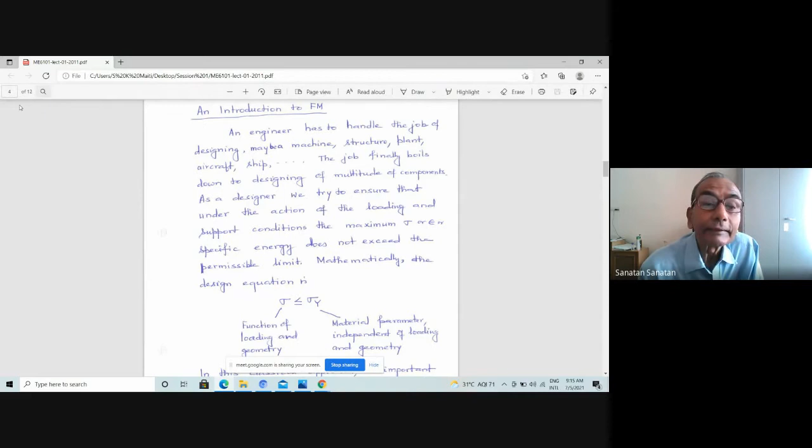Yesterday we did that, so where is that scale? It is on top. It's okay, a little more will also do. Okay, perfect, that's good. Thank you, thank you sir.

All of us are engineers, and mechanical engineers, one of the important jobs we have to do is the designing of machine structures, plants, aircraft, ships, and many things of that type. Even a system, a power plant, a whole aircraft - all these are our duties.

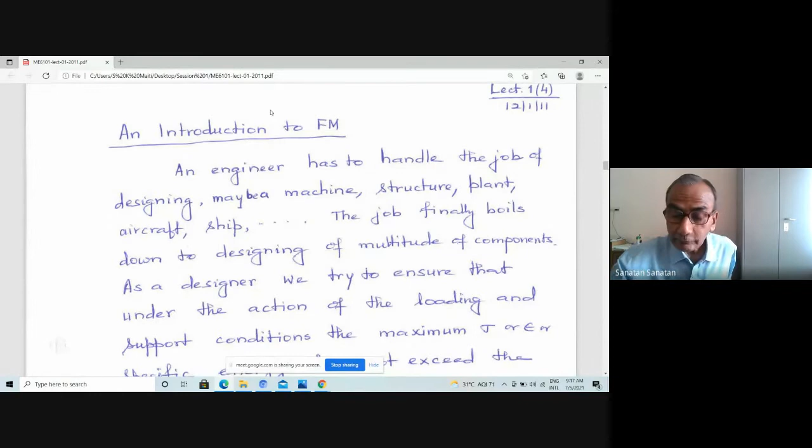If you really try to look at the core aspect of design, as a designer what we do is try to find out the action of loading on the structure, down to the elements of the structure. Our responsibility is to make sure that the maximum stress or strain in the whole component nowhere exceeds the permissible limit. Therefore, we generally consider the simple design equation that sigma is less than or equal to the permissible stress.

And if we try to make it a yield point based design, then we write that the maximum stress in the whole component should not exceed the permissible limit, sigma y, the yield point of the material. So that has been our traditional design strategy.

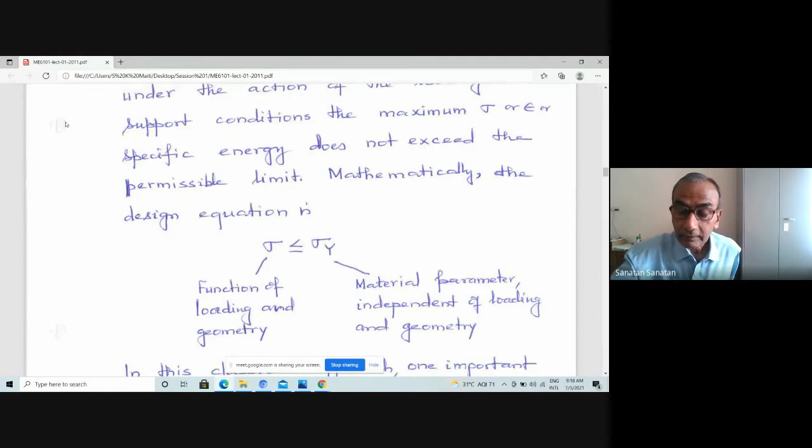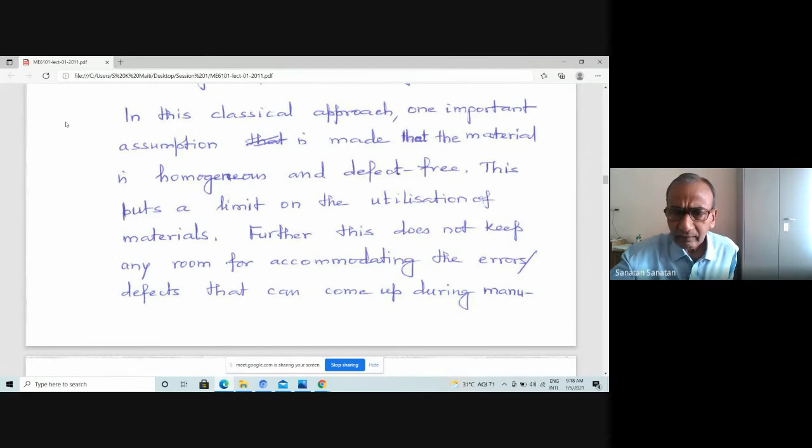Unfortunately, this strategy has some pitfalls. This approach has limitations - the material has to be homogeneous, free of defect, which puts a limit on the utilization of materials. Further, this does not keep any room for accommodation of errors or defects in the material, and these defects can come up during manufacturing or in service. So this approach does not really give us any room for accommodating all this.

Let me stress these points, they are very important. Defects in the material can come up in the parent material, during manufacture, or even during the service life of the component, so these are obvious, they will come. In fact, according to ASTM, 90 to 95% of components are not subjected to static loading, they are subjected to cyclically varying loading, and they are designed based on some approaches.

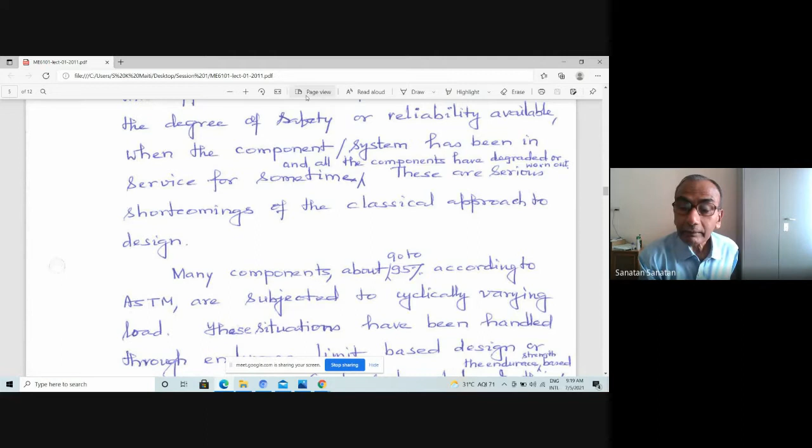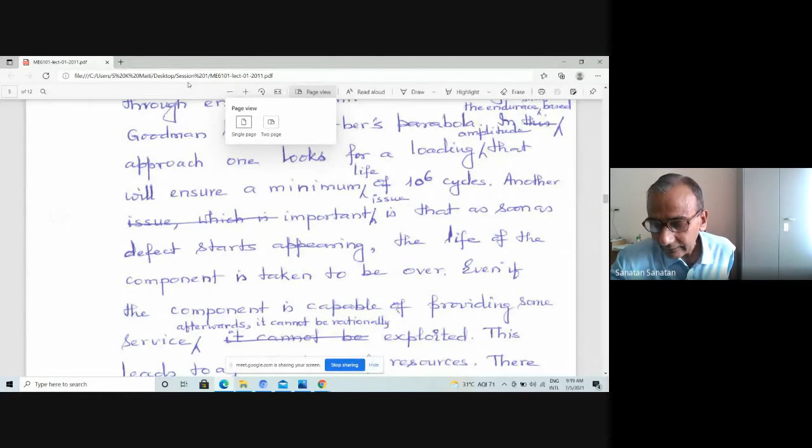Even considering design based on this approach, many components are subjected to cyclic loading, and our design is that if the component can withstand about 1 million cycles, that's fine - the load it can withstand will be the permissible load. But then the question is, even after expiry of that life, it does not become useless.

It still has some utility. If we wanted to see whether we can go on using that defective or damaged component for some more time, then the question is how long can I make use of it, and how do I go about finding out that question? There is no answer in the classical design approach that we take.

Now I just wanted to illustrate and give you some points for thinking. I'm sorry, what is this? Why has it become like this? You can just increase the size again by pressing that plus button. Now I think why is it actually... I also don't understand.

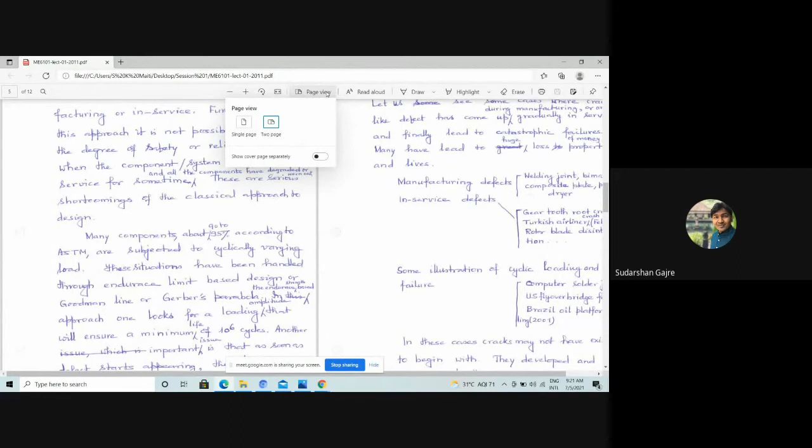Now you see why it has become like this - page view. Click on the page view, the fourth button on the top. Page view, single page, on the left, single. Yes, that's okay, that's what it is. This whole nonsense has come. Now let me see.

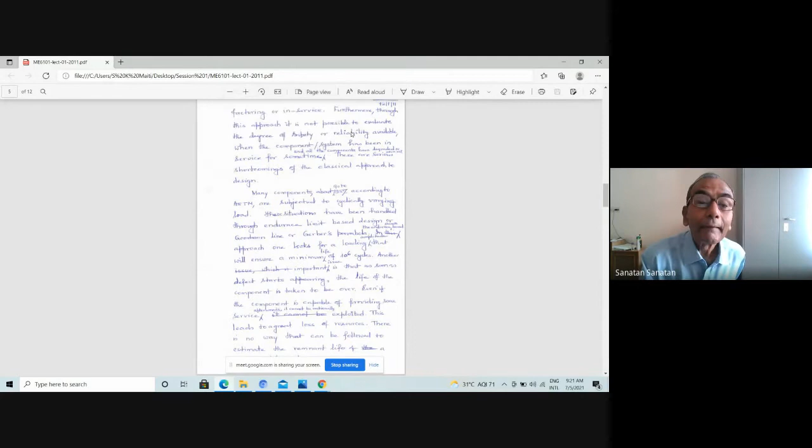Okay, sorry. No problem, sir.

Look at this manufacturing defect. Welding is a manufacturing operation, and during welding, defects certainly come up in the joint and welds. If we consider a bimaterial composite plate, there will be some disjoint, and then there is loss of continuity of material. So these are some of the defects which come up during manufacture.

Then coming to in-service defects, the gear tooth. The gear tooth is continuously subjected to loading which fluctuates from maximum to zero and back to maximum. This kind of loading comes up in service and leads to damage origination. So we have to ask: how do I ensure the safety of this component at that point? There are many failures that have come up because of these in-service defects.

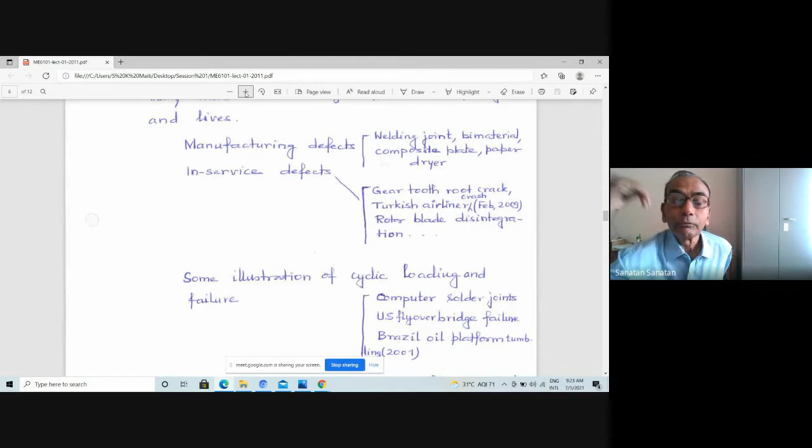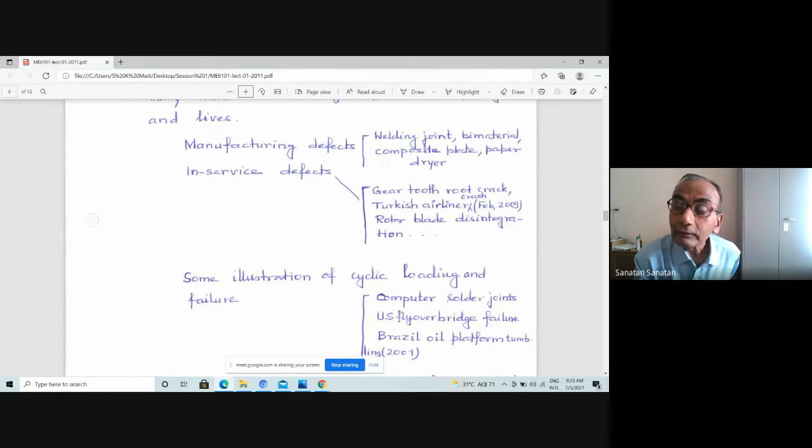Turkish airline, which failed in February 2009 - a rotor blade disintegration took place, originating from a crack and finally leading to catastrophe. There are many such examples which are recorded, and I would like to talk about them a bit.

Consider computer solder joints. Nowadays computer manufacturing has thousands of solder joints, and because of temperature going up and down, defects come up in these joints, leading to failure due to cyclic variation of load.

Another example: US flyover bridge failure, Brazil oil platform just crumbled down. These are all actually originating from some defect which came up during the service of the component.

So a crack may not have existed to begin with - it developed and grew gradually, and finally led to fracture. This is how catastrophic failure comes up. So therefore now the question is...

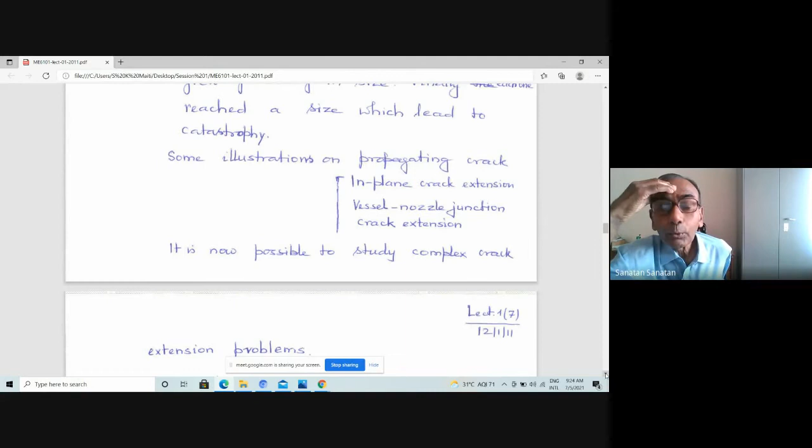Propagating cracks have also been noted in mechanical applications, particularly pressure vessel nozzle junctions. That is one crucial location, and if they are working under temperature-variant or load-fluctuating conditions, they also give rise to cracks which gradually propagate.

Now the question is, as a designer, we have to make sure that even if cracks are propagating, we should be able to take some preventive measure, or at least calculate the degree of safety and reliability of this component at that point of time, and if it's going to last for some more time, how long, and how do we actually determine that? These are some of the concerns.

Classical designs are not really in a position to give you an assessment of safety after the system has been used in practice for some time, and they cannot tell you how much load it can carry at that point. Therefore they cannot allow you to calculate the load capability or how much time we can go on making use of it. These are some questions it cannot answer.

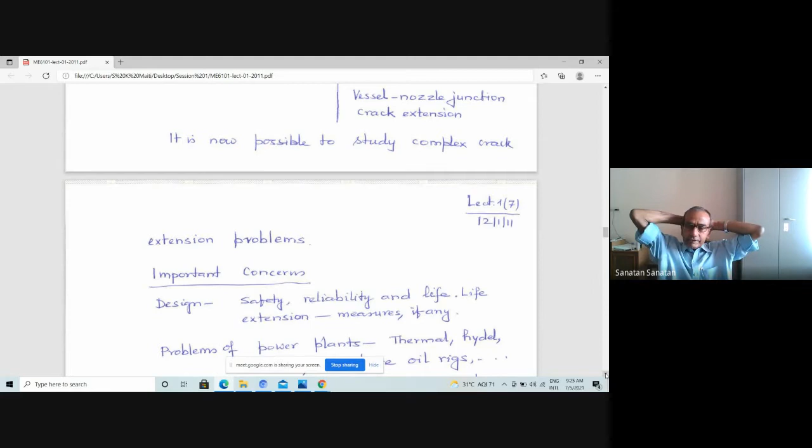Now the question is that designers and users of the system would like to know how much safety is available at this point of time and how long we can go on using it. These are some of the questions we cannot answer from classical design considerations, and therefore there are gaps.

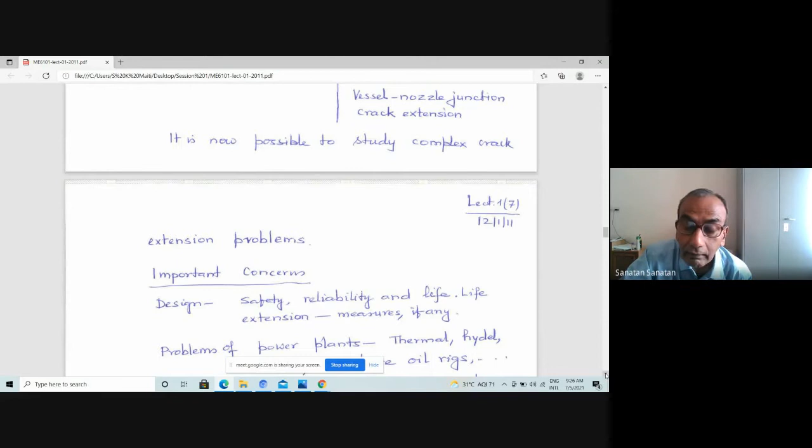The problems of power plants are also very important for consideration. Power plants - thermal, hydel, nuclear, offshore rigs - are subjected to fatigue loading, thermal loading, and deleterious environment. They work in environments that affect the structure and increase the damage because of their presence. These are issues which cannot be addressed by classical design.

Another important issue to recognize is that nowadays everybody is interested in using less material for the same machinery while being able to take more load. So everybody wants the design to become lighter, yet able to take more load and give more life.

So in the process, you see that the common tendency is to use stronger material, lighter material, and in fact, unfortunately, nature is not kind to us. If you make material stronger, it actually brings in some problems. Your less strong materials in general have a little bit of plastic deformation capability or ductility, which can really give some benefit. But as you make the material stronger, they are actually brittle, and therefore the problem increases.

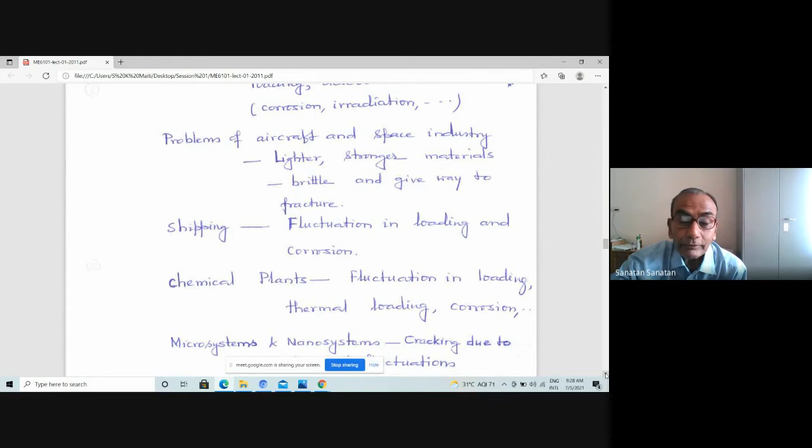Fluctuation of loading in the shipping industry: they are also subjected to corrosion plus fluctuation in loading. Chemical plants as such are subjected to fluctuation in loading, thermal loading and corrosion. So all these problems exist. Microsystems, nanosystems, cracking due to thermal fluctuation, that I was mentioning: in the case of solder joints in the computer, there are many solder joints, and these are subjected to thermal cycles, and therefore they also give rise to damage and then finally lead to failure.

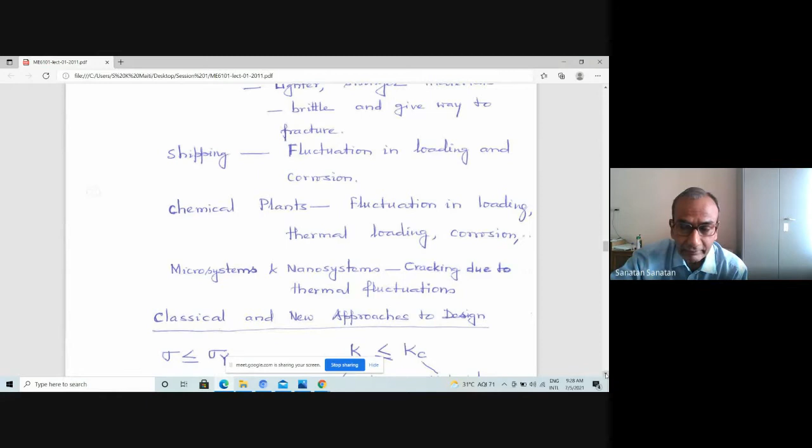So therefore the question is that many deficiencies are there in the classical design, where the maximum stress sigma is less than the permissible value sigma y. So this is the problem, that the old classical approach to design suffers from this. So there is a question of how you overcome this. And obviously a new concept has to come up, and fortunately it has come up with the development of fracture mechanics.

So fracture mechanics has finally given rise to a simple equation which looks similar to that classical design equation. It is K less than or equal to some critical value of K. If you put it in a slightly different manner, in design you take the structure and its loading and the different conditions under which it is operating, and under those circumstances you try to calculate the parameter sigma, which could be the maximum principal stress, the maximum shear stress, or if it is strain-based, maximum strain and all that. So the classical design equation looks like that. And fracture mechanics also has given rise to an equation of the type K is less than or equal to Kc.

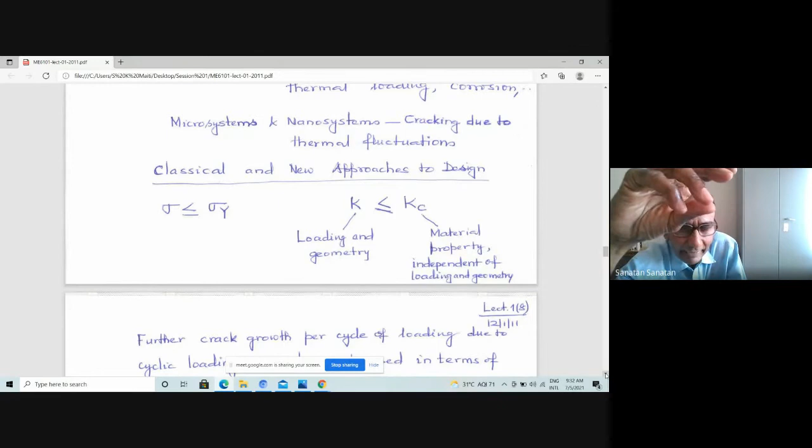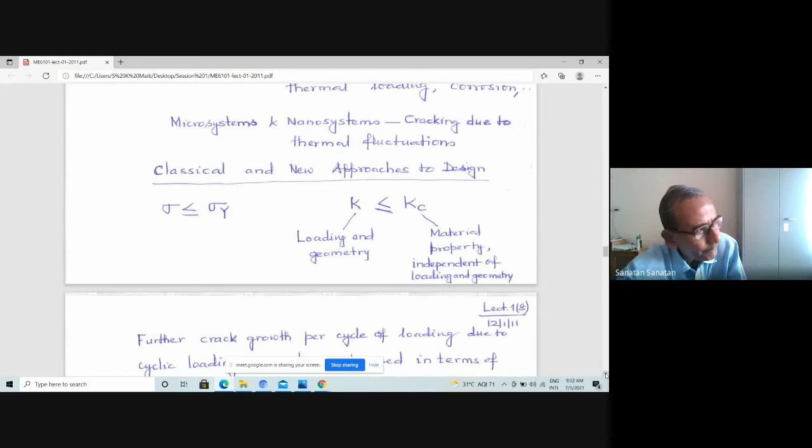So now you can extrapolate to the new design strategy, which is based on fracture mechanics. Fortunately, it has come up with a similar looking equation, K and Kc. K is the parameter determined by understanding the subject of fracture mechanics, and obviously you would also have concurrent experimental procedures to find out the permissible value of K. So this is how it is. Damage tolerance based design is really based on damage detection and calculation of the parameter associated with the damage in the structure, and then making sure that parameter is less than the permissible value which is determined experimentally. So this is how it is.

So you can imagine that in this new approach to design, you will be exposed to this background, and you should recognize that the lectures will make you aware of the parameter K, and at the same time, determination of that value experimentally. You will also be given some examples of applications.

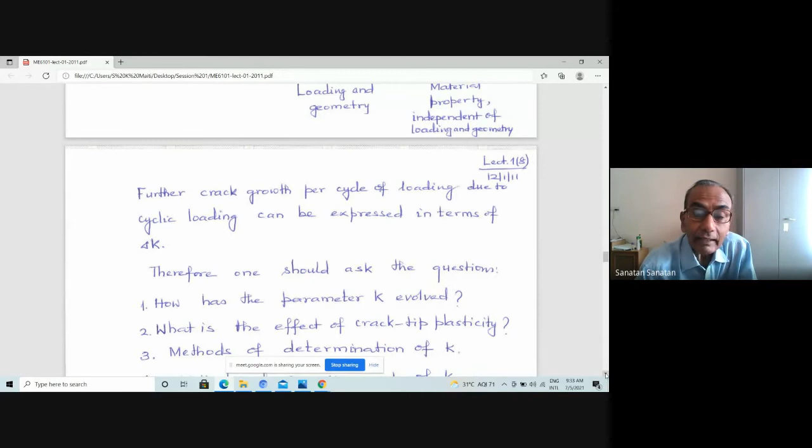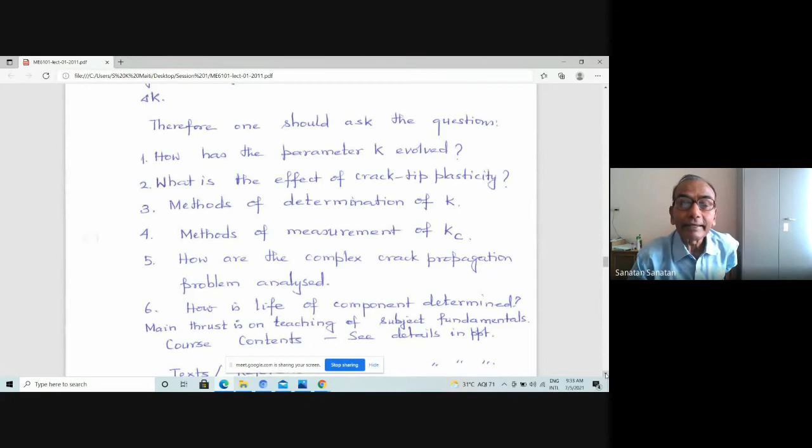So to sum up, as a participant, what you should be asking is: how has this parameter K evolved? That is the first thing. Even when you went for engineering, they made you understand what is stress, and then how to calculate the stress in components of various geometry. This is how it will gradually go.

Then, what is the effect of crack-tip plasticity? Obviously materials are not all perfectly brittle; there is some plastic deformation capability. So you will be given the understanding of how this crack-tip plasticity is accommodated.

Then this K parameter, sigma, like in classical design—how is this K parameter determined, and methods of measurement of the critical value of this K, and the propagation problem—we are also going to look into that.

If a crack originates in a component, it is going to propagate. If we know the path of crack propagation, we can take measures to prevent its propagation. So you will see how this crack propagation route can be determined. These are some of the things this course is going to bring out gradually.

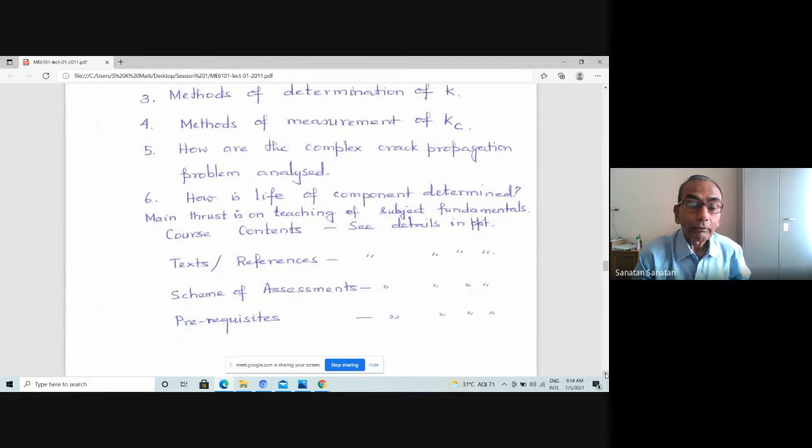That's all. Now let's try to get into some understanding you may already have, and new understanding that we are going to bring in. I will get started with that part.

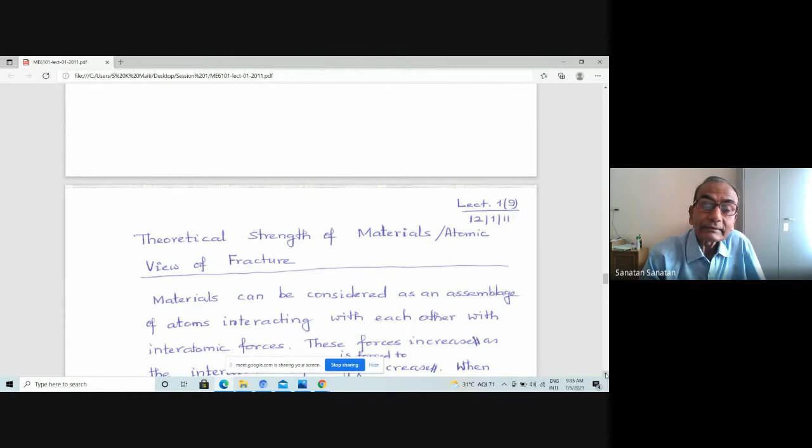If you consider how this subject originated, it also has a history. Material scientists were looking at material as nothing but an assemblage—an assemblage of atoms interspaced, interconnected by, or interacting with each other, through interatomic forces.

So when you consider a material as a picture of atoms placed in space and interconnected, you can imagine them connected by springs representing the interatomic forces. Atoms are interspaced and interacting with each other through these interatomic forces, represented by springs.

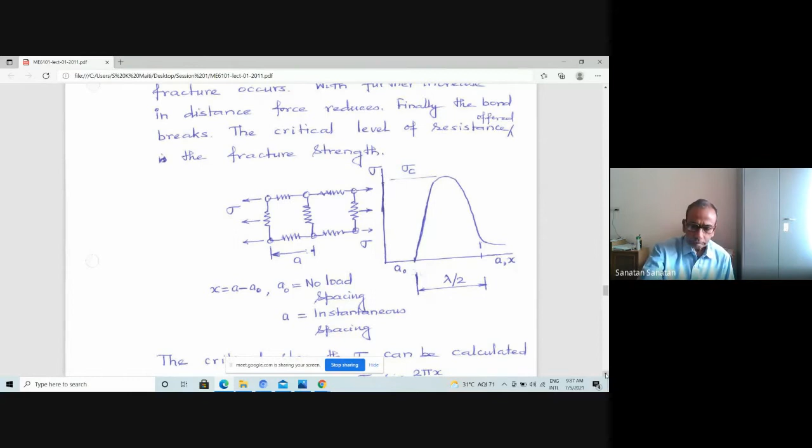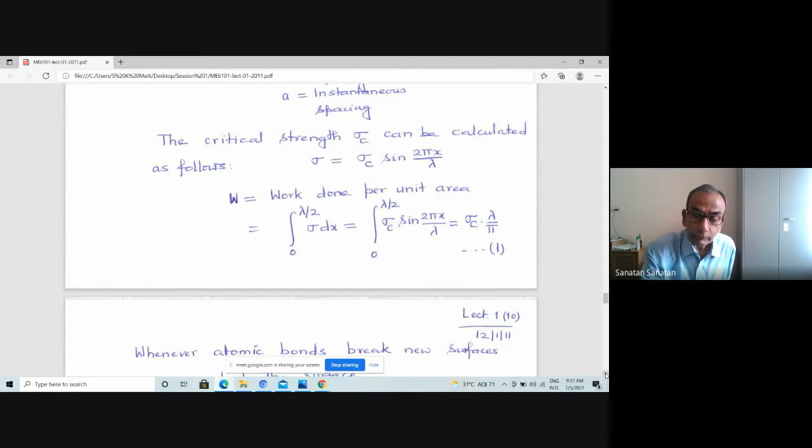This can be written as sigma varying in a sinusoidal form. So if you work out how much work is done in increasing the interatomic spacing, that is W, calculated as the integral of sigma dx over the half wavelength, lambda by 2. This gives the energy required, which is sigma c lambda by pi.

Now the question is, once you have put in this much energy, what does it do? When the material gets separated, where does that energy go? The energy cannot just be eaten up.

So what happens is, if you take a material of unit area and pull it, it breaks into two pieces. If you try to pull a chalk piece and keep pulling it, it gets broken into two pieces. The material is brittle here, so after failure, two surfaces are created.

New surfaces are created, and to create a new surface you need to supply surface energy. If each area is one unit, and gamma s is the specific surface energy, then to break the element you need 2 gamma s of energy. This energy comes from the work done when you are pulling it - you put energy into the system through that work, and when it fails, that work done supplies this surface energy.

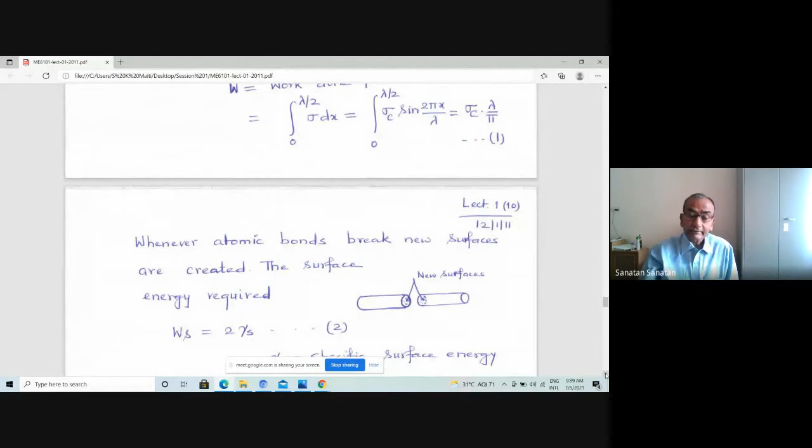It goes as surface energy. The energy can be considered as strain energy of deformation, and when the material breaks, that strain energy of deformation goes to supply the surface energy. So one form of energy gets converted into another, and that's how the new surface is created.

For energy conservation, the work done equals surface energy. By making some approximations about sigma as modulus of elasticity multiplied by strain, and doing a bit of manipulation, using W equal to WS, finally gives the strength - the maximum tension required - calculated as E into gamma S by A0. Here E is the modulus of elasticity, gamma S is the specific surface energy per unit area, and A0 is the initial spacing between two atoms.

This was first calculated by material scientists - what is the theoretical strength of a material? For any material you can calculate this theoretical strength. Using normal data for surface energy, the critical strength comes out as modulus of elasticity divided by 10. But for most engineering construction materials, the actual strength is in the range E by 100 to E by 1000. So theoretical strength is E by 10, but actual strength is E by 100 to E by 1000 - that's 10 to 100 times less.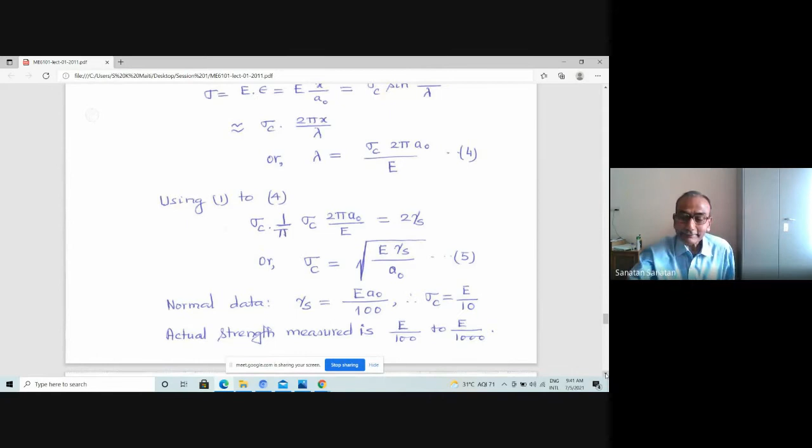This model, which was initially given, ran into these questions. Consider steel: ultimate limit is about 400 to 800 MPa, and E is 200 GPa, then the range of actual strength is E by 500 to E by 250. So this is much less than the theoretical strength.

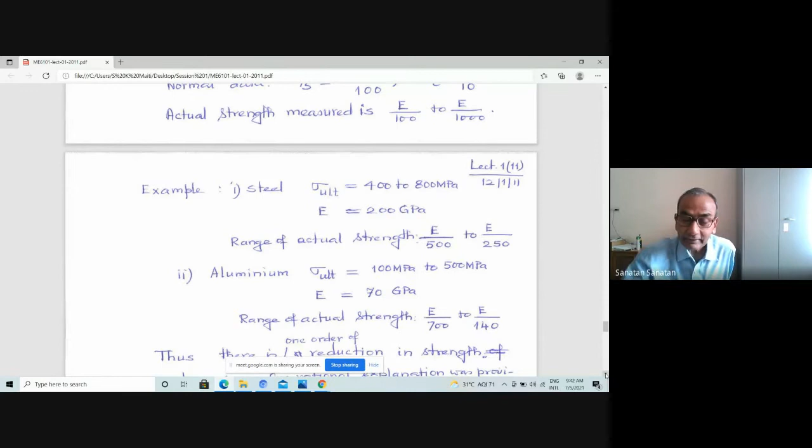For aluminium, ultimate stress is about 100 to 500 MPa and E is 70 GPa, giving an actual strength range of E by 700 to E by 140. Theoretical strength is E by 10, but actual values are E by 100 and more. So the question is: theoretical strength does not correspond to the actual measurements we see.

This remained a question, so scientists again searched for the answer, and the first answer was given by Griffith. He said that although we consider material to be defect-free and flawless, in actual practice there could be defects in the material in the form of cracks, disjoints, and elliptical cutouts.

That concept was brought in: although we apply sigma at the loading point, in actual cases the stress that exists at the tip of a stress concentrator, like a crack, is much higher. It's the stress concentration factor which amplifies the stress, and that actually fails the material - it breaks the material at a much lower level of external load.

That was one explanation given, but it was not very acceptable - it had pitfalls, because we generally consider design at the macroscopic level, not the microscopic level, and this model was really meant to be effective at the microscopic level.

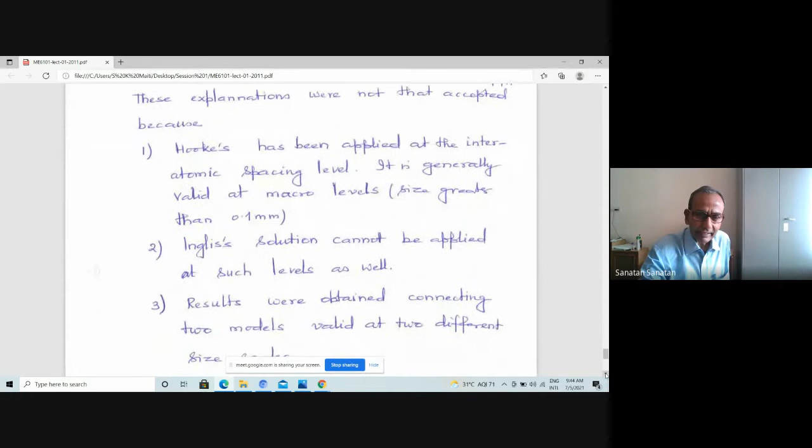So this mismatch didn't allow this theory to be acceptable for a long time. It didn't go further. Hooke's law is generally applied at the macro level, not microscopic level, but these models are actually at the interatomic spacing level, so they are also not acceptable. So all these things are gone, and finally new ways of thinking came up, about how can we really make something different. Just one second, I have to get some more slides.

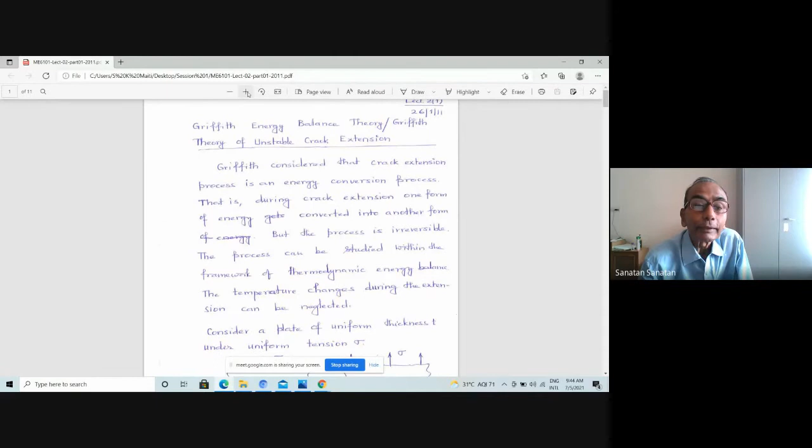Good, thank you. So this sort of explanation that was not acceptable by the scientist community, it had its end. And then a total different approach to consideration of failure came into being. I would like to stress that this is the state where this damage tolerant design concept, or fracture mechanics concept, started evolving. It's around 1920 that people started thinking. This thinking was actually at the beginning of the 20th century.

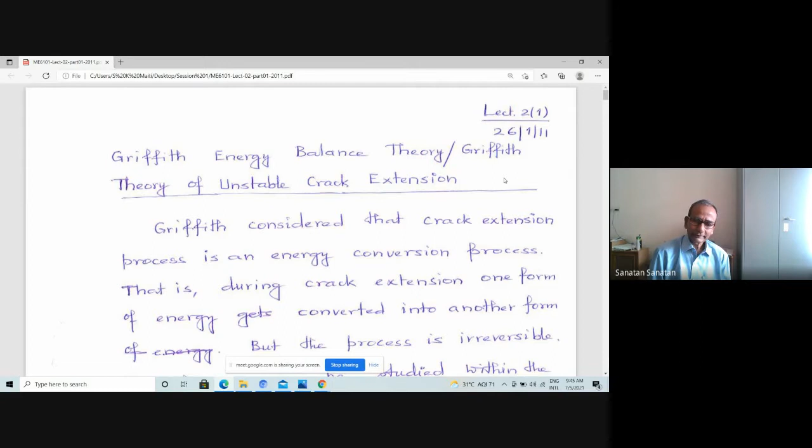And therefore this is something which came up in about 1921, so 20th century beginning. I would like to stress upon that please look at the way scientific development has come up. So Griffith was the first man who started actually thinking about the failure of the material.

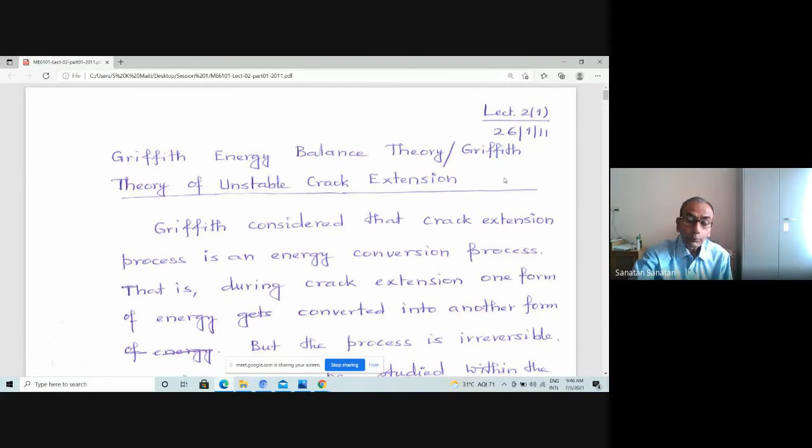It's not really that it is stress reaching a critical value or strain reaching a critical value, it is different. He started thinking that this material failure should be looked into within the scope of the first law of thermodynamics, energy balance. That if some failure is taking place, it's giving rise to transformation of one form of energy into another form, and therefore this energy balance concept should be the basis to understand failure. So Griffith gave the energy balance approach to failure, which made the beginning of fracture mechanics.

So what happens, if you try to take a flawless plate, then you have stress sigma everywhere, and if you just have a defect inside the material of size 2a, when you are pulling the material, it is logical to expect that the material above and below the crack becomes a shadow region. It does not actually get loaded. When you have a plate without any crack, it is uniformly stressed everywhere, but when you have a plate with a crack and it's loaded, there is some area which becomes a shadow area - there is no loading on it.

And therefore what he said is that this shadow area does not have any energy. Energy means when you load a component, it has strain energy per unit volume. But when you have this bit of material which becomes load free, it does not have any energy content. So you can think of it that as the load increases, the crack extends, and the size of this shadow region increases, so the quantum of material becoming energy free is also increasing.

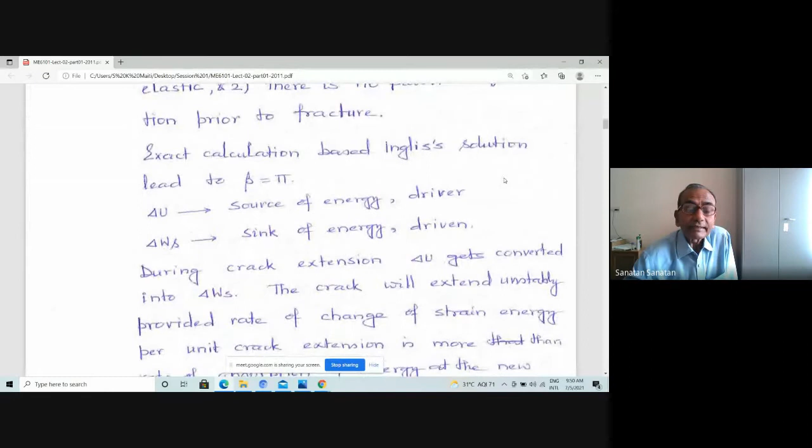He propounded that the rate of release of strain energy is the source of energy, and the rate of absorption of surface energy is the requirement. So the sink of energy is the surface, and the source of energy is the strain energy. The driver is the source of energy, and the sink is what is driven. So it is the conversion from strain energy to surface energy that is the crack propagation process.

So that's how the whole concept changed. No question of stress and strain anymore - it is more of an energy balance, a thermodynamic energy balance. So people started looking at crack propagation as nothing but a thermodynamic process of energy conversion.

With all the calculations, if delta U is the strain energy change per unit crack extension, and delta Ws by delta A is the energy required per unit crack extension, then this is the condition of unstable crack propagation: if your availability of energy is more than required, it leads to unstable crack propagation.

These calculations finally gave the critical stress capacity of a material, of the form sigma equals sigma CR, which is nothing but E times 2 gamma S divided by pi A, square root. This new expression had a similar structure to the classical interatomic spacing model, and this became the starting point of calculating the fracture strength of a material with a crack, with a defect.

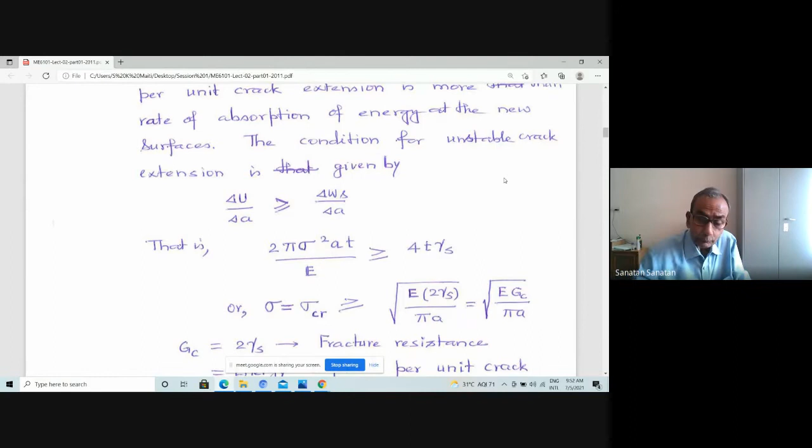First time it is with defect. So sigma CR is E times 2 gamma S by pi A, and it was written as E GC by pi A. GC is nothing but the fracture resistance of the material, and its value is nothing but 2 times gamma S, where gamma S is the surface energy requirement per unit area.

Griffith showed this experimentally - he did experiments, because nobody will believe without experiment. In science, you cannot just propound a theory and expect people to accept it; you must also show it experimentally.

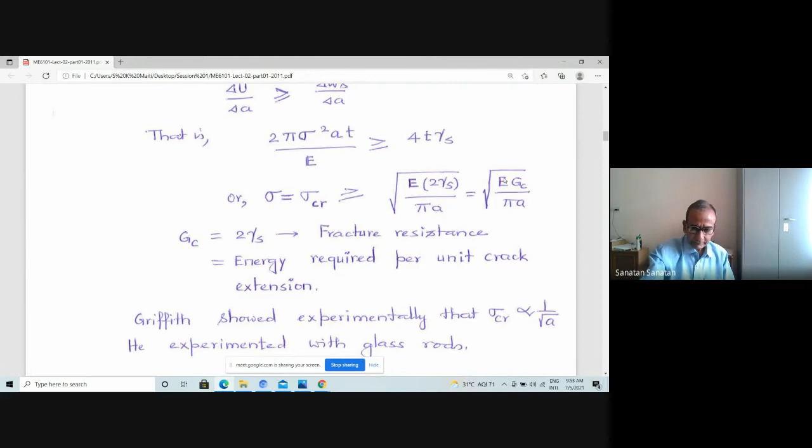Griffith did experiments and finally showed the relationship that sigma C is proportional to 1 over root A - a reciprocal relationship. He did experiments with glass rods, many experiments, and confirmed that whatever the theory predicted is exactly what came up.

So that's how it became the starting point for finding the critical load capacity of a structure in the presence of a crack. It is actually a fantastic stage of development in strength of materials or material science.

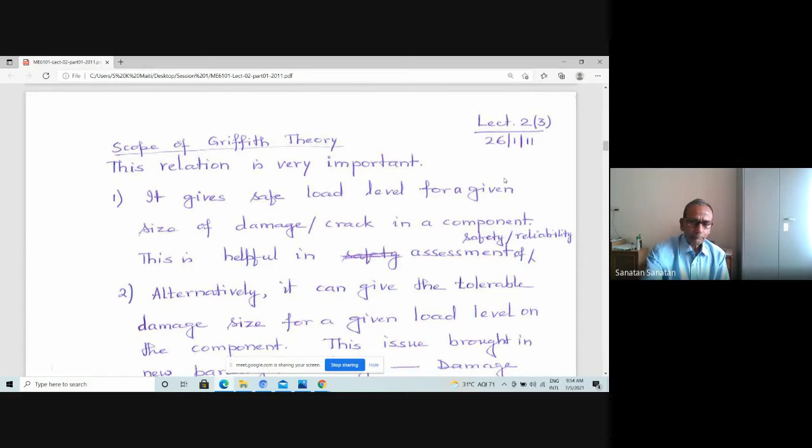Let us reflect on the scope of Griffith's theory. This relationship is important - it gives the safe load level for a given size of damage or crack in a component. So for the first time, you are in a position to calculate the safe load capacity of a component with damage or crack in it.

Alternatively, it can give the tolerable crack size for a given load level on the component. It gives you the critical load capacity once you know the geometry of the structure and the crack size in it. Alternatively, if you have a structure and loading, you can ask how much crack or damage can be tolerated - that's what damage tolerant design is about: how much defect can be tolerated in a given structure with its geometry and loading.

So that is the basis of this damage tolerant design. And in fact, it became a fantastic stage of development, and it really opened up the process of damage tolerance to aircraft design, all airborne structures, space-going structures, space-going vehicles. Structures are actually all the time designed based on damage-tolerant design.

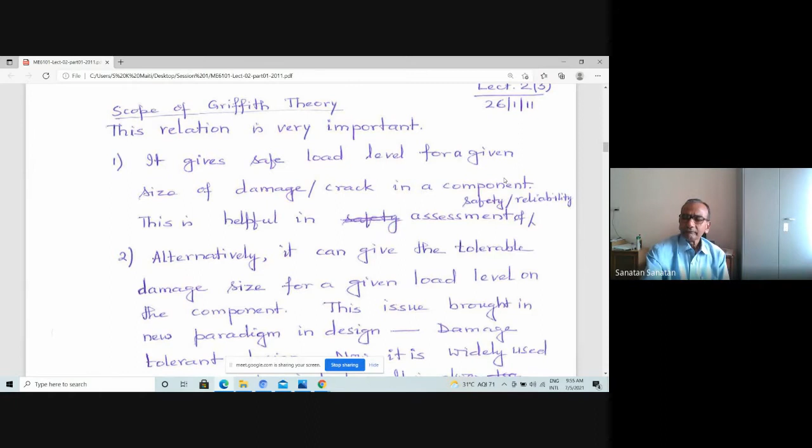So that's how it is a very important development, and therefore you must understand the varieties of problems that can be there and how do you address them. So that's what it is. This theory was given around 1920-21, just after the First World War.

And then the limitations of this theory. What are the limitations? It has come, it's nice, it gives clarity in applications, no difficulty. But the question comes up that there are also deficiencies. What are the deficiencies?

It cannot be applied to ductile materials. Griffith considered the situation where the material is brittle, with no ductility, so no plastic deformation. This was fine because mostly the materials then were highly brittle. So the drawback is that it does not easily apply to materials with plastic deformation capability.

This is one shortcoming. And then, he considered the crack to be in the orientation perpendicular to the loading direction. This is called the opening mode of crack extension. It cannot be applied if the crack is at an angle to the loading direction.

And the other thing: classical understanding of failure of material is based on stress-strain distribution in the whole body, but in the presence of a crack, this energy balance theory does not give any importance to the stress-strain distribution at the tip of the crack. Classical approaches would say there must be some typicality in the distribution of stress and strain near the crack tip, but this theory does not give any importance to it.

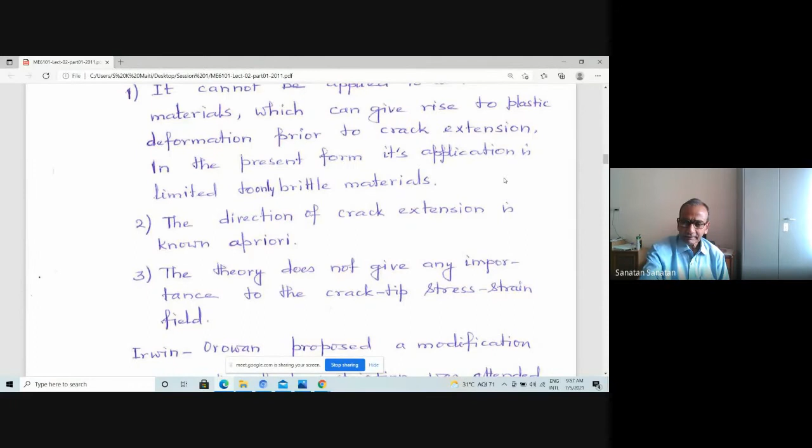So these are some of the shortcomings of the model, and gradually people tried to overcome these problems, and that's how the subject developed further. The first objection, that plastic deformation cannot be taken into account, was addressed by Irwin and Orowan, two scientists who looked into it. Let's see what Irwin and Orowan stated.

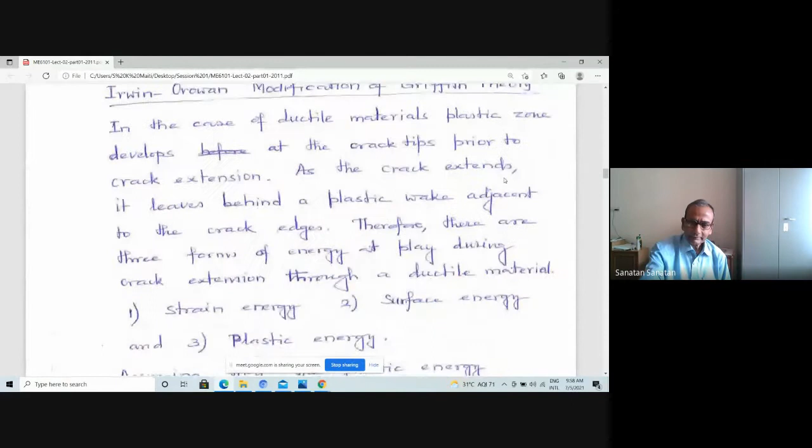Irwin and Orowan went back to the model considered for material failure. When you have a material or structure with a crack and you load it, stresses and strains become very high near the crack tip where stress concentration prevails, and therefore the material, rather than just failing, will first give rise to plastic deformation.

So plastic deformation takes place, and then probably it propagates. So before crack propagation, you have deformation energy or strain energy in the body, and then if you create new surface, surface energy is also there. But before it actually becomes new surface, the material will deform plastically. Earlier we considered only that strain energy gets released and goes to create new surface—two forms of energy—but they considered that it's not that way.

You deform the material and input strain energy into the body, and near the crack tip, before propagation takes place, it gives rise to plastic deformation. Plastic deformation is an irreversible process and it absorbs some energy. So before crack propagation, plastic deformation takes place, and some amount of energy goes into that zone which undergoes plastic deformation.

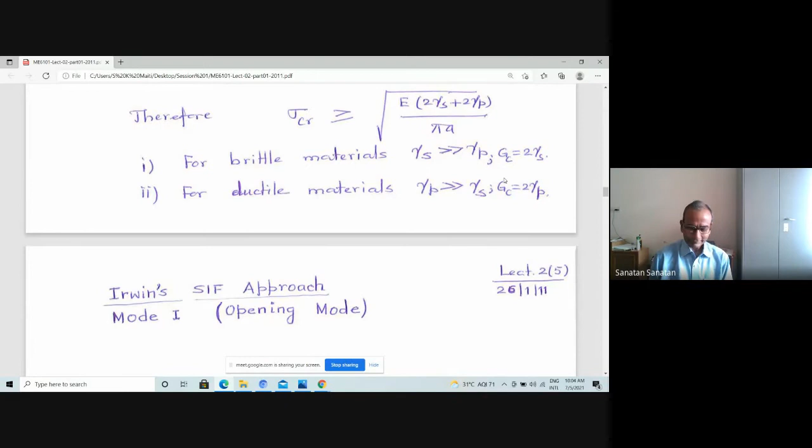Around 1959-60, that's when the new approach came, and it could overcome some of the objections that were raised. Therefore this is considered to be the beginning of fracture mechanics. So we would like to get started with this.

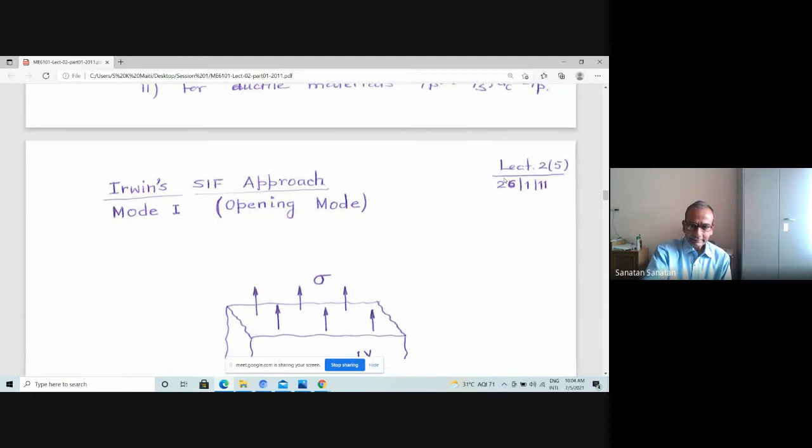This was answered by Irwin and his approach. Imagine the crack like this, in a component loaded perpendicular to its plane, trying to open up the crack faces. This is called the opening mode of crack extension—the crack faces try to separate out, increase the distance—and this is mode 1.

He not only identified this classification—this is mode 1 crack—he was also the person who found that we must understand the stress field around the crack, and he was able to solve the problem of elasticity of a component with a crack in it, and the stress field around it.

That stress field around the crack was obtained by him, and this is the form: sigma x is the stress acting parallel to the x direction, the crack plane direction. It has a form with one parameter, K subscript 1 for mode 1, and a theta function, which is a function of r and theta—distance from the crack tip and angular disposition.

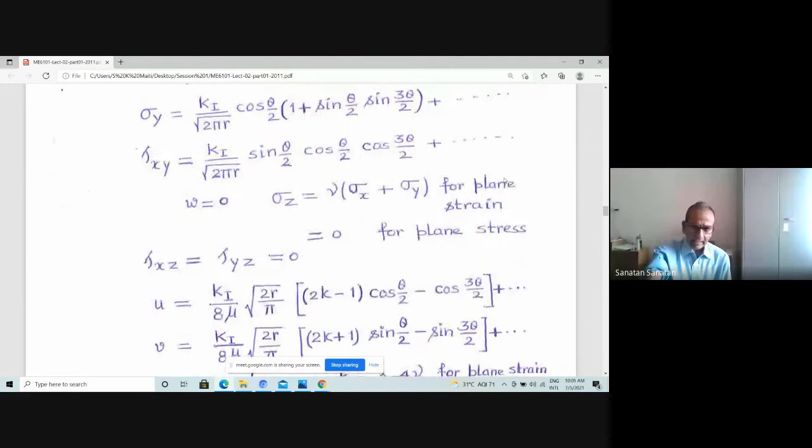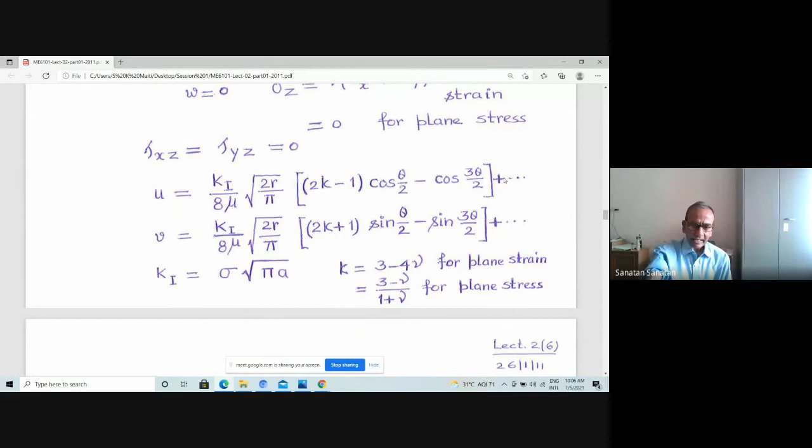And then there are the displacements around the crack tip, and this parameter K1 is given by the load applied remotely and the crack size. So this stress field—please study its form—it is K1 by root 2 pi r. K1 is a parameter related to the crack size and the external load applied, and the function of r is inversely proportional, proportional to 1 by root r. So as r reduces, stresses increase.

Stress actually becomes infinity at R equal to 0, and there is an R theta function. In fact, it is the first term of an infinite expansion. First term is R to the power minus half, next term is R to the power 0, then R to the power plus half. This common difference in the exponent is half. So this is the form of the stress field.

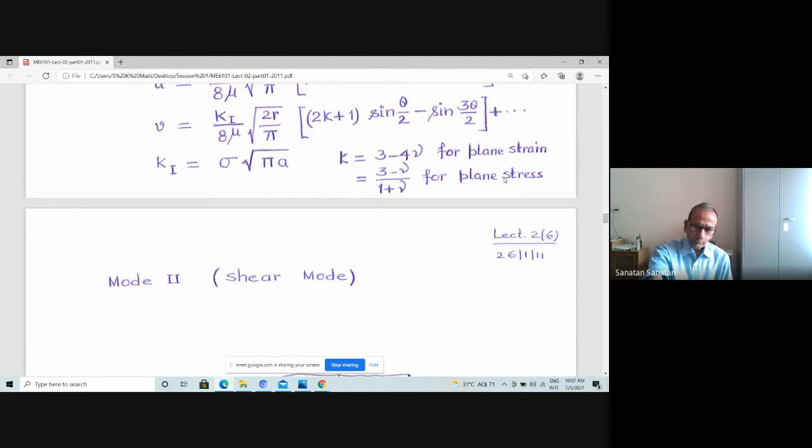So this is how it is. Then the loading he considered can be in 3 fundamental modes. First is opening mode, where the loading acts perpendicular to the crack plane. Second, loading could be parallel to the crack, which is shear mode loading. The load is parallel to the crack plane, and this is considered mode 2, shear mode. So this is how it is.

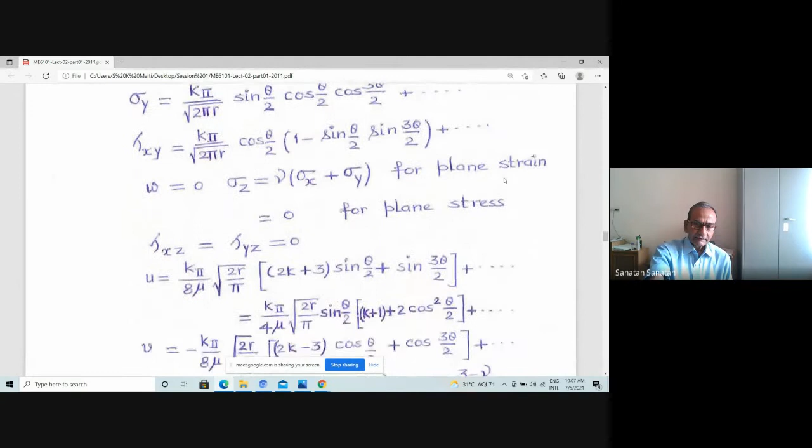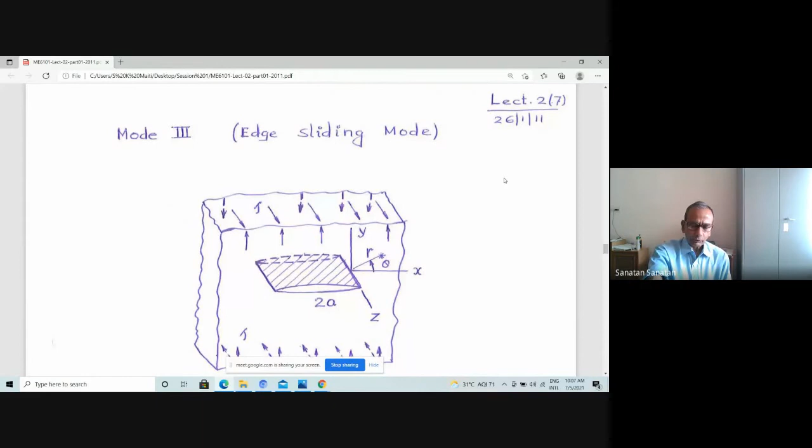He again analyzed the stresses and displacements and gave the value of this parameter K2. So these two modes are there. The third mode is this one: twisting mode, also called shear torsion mode. This is torsion mode, it can be twisted, and this twisting mode is considered mode 3. In torsion, if you have a shaft with a circumferential crack subjected to torque, it will be this mode of loading. So here again, he tried to find out the stress field and the full expression. That's how it is.

So let us get a little comfortable about what these modes are, where they occur, and why we should bother about them. You see examples of mode 1 and mode 2.

Particularly for mode 1, think of any linkage mechanism — in a railway, by the side of the track, you find links that push as the carriage goes, and when they are pulled and pushed, they are subjected to loading in the axial direction. Similarly, in a pressure vessel under internal pressure, if you have a crack in the axial direction, it is also subjected to opening mode. For a beam, say a cantilever beam with a crack perpendicular to the axial direction, that is also subjected to opening mode.

Think of a rotating disc, a grinding wheel, or any high-speed shaft. If you think of a thin sheet rotating, the centrifugal forces develop stresses both in the circumferential and radial directions. So if you have a radial crack in a rotating disc, the tangential or circumferential stress is going to open up that crack — that is mode 1. So all these are mode 1 crack examples.

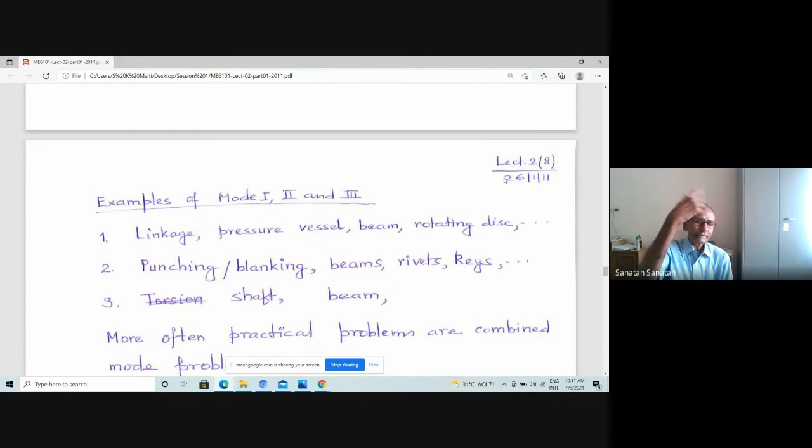Then in the case of a shaft, if you just think of a keyhole or rather a notch made around the circumference, then when you are twisting it, one side of the shaft and the other side of the shaft are trying to have displacement in the circumferential direction, and it is really giving rise to mode 3 loading. And therefore, these are actually practical examples.

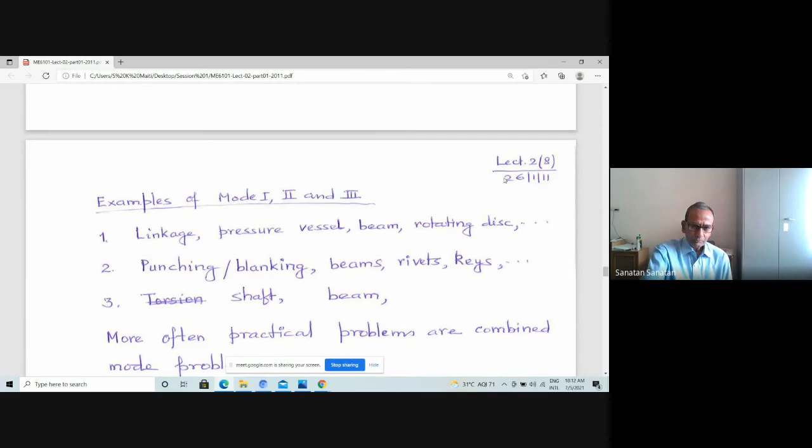There are many examples, and these are certainly practically occurring, and then in general you will have problems of not one mode, it could be more than one mode. So, a mixed mode problem. So therefore the study is very, very important. So what we will do, let me just see what we can take up.

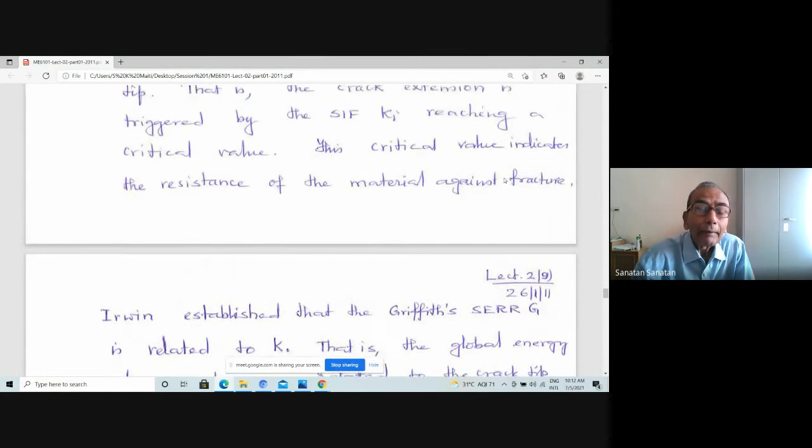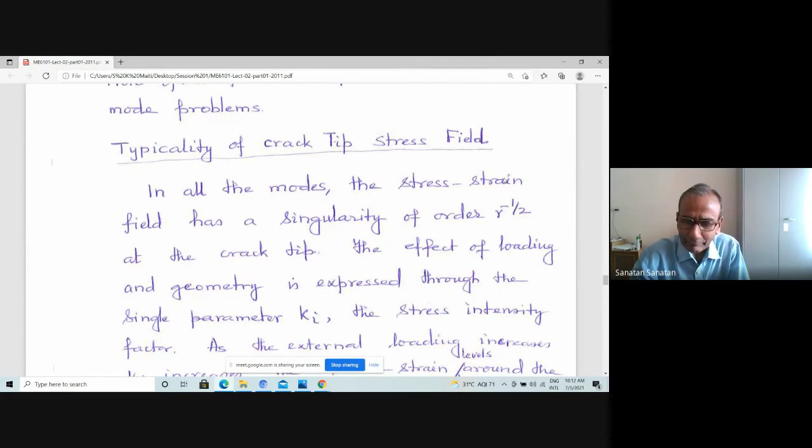The other issue that I would like to discuss now is that this exact stress field was determined, and therefore the objection that was raised by the people was eliminated. But now the question comes up that in science particularly, if you say that a new theory has been given, then people in general would expect that you link the new theory with the existing theory in some way. So that was actually something very good.

The person who really developed this stress, K, it is called the stress intensity factor. The stress intensity factor based approach was given, that this K is an important parameter for failure. When you think of the increase in loading, the K parameter is related to the loading. As you increase the loading, stresses also increase, and from common sense you can say that a typical level of loading is leading to fracture, and therefore a typical value of this K parameter is reached at the point of failure.

So that's fine. But then people also found that the energy balance concept of Griffith is a very sound concept, and therefore you cannot just say that the stress intensity factor is the parameter which is leading to failure. It was very important to establish that this reaching of a critical value of the parameter K is also linked to the conditions that Griffith gave: that at the point of unstable crack extension, the energy release rate is reaching a critical value, which is equal to the energy required for creation of new surfaces.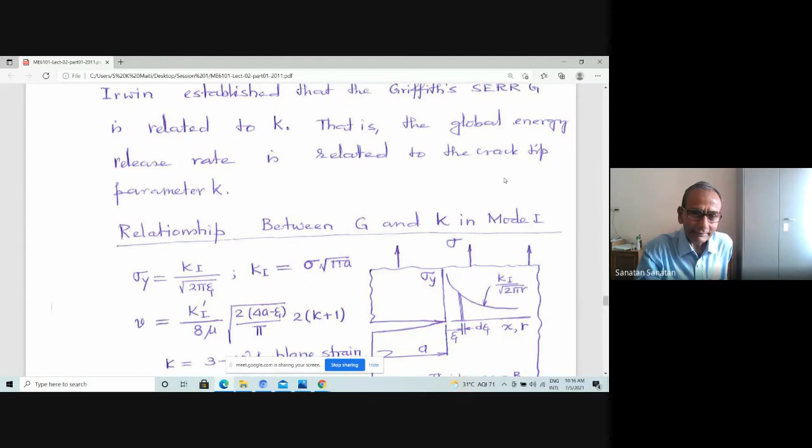So that is something which we would like to see, and it is all mathematically established. We would like to consider how we get the relationship between the strain energy release rate G of Griffith and the stress intensity factor at the point of onset of crack extension. So he took up the case of mode 1, and what he considered is that we have a crack of size A in the plate, which is a uniformly thick plate, and it is subjected to remote loading sigma.

When we consider x or r having its origin at the crack tip, the variation of stress acting in the y direction, sigma y, on the crack line varies as K1 by root 2 pi R - a square root variation. As distance increases, it reduces, and at R equal to 0, stress becomes infinity. So at the crack tip, stress is infinity.

The mathematical solution gives you the picture that at the crack tip, stress is infinity. So you cannot just apply the classical theory that stress reaches a critical value leading to fracture. That cannot be answered - that approach is invalid.

But then, if you plot sigma y stress against R, it actually varies in proportion to 1 by root R. So it is very high at the crack tip and gradually reduces with distance R. This sigma y stress on the crack line is given by K1 by root 2 pi R, for theta equal to 0.

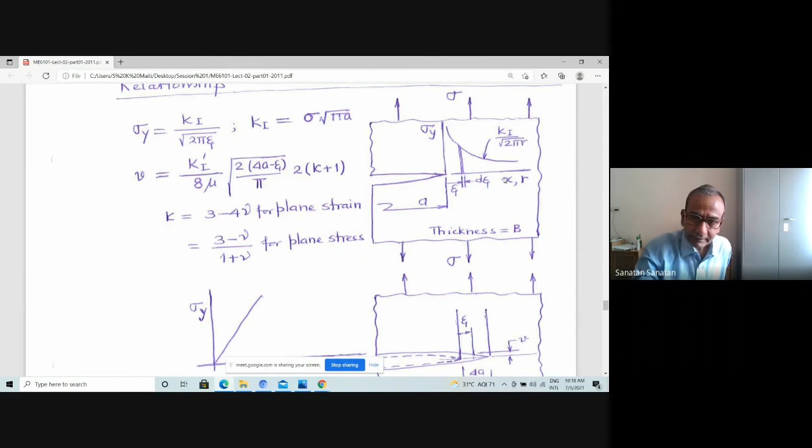As the crack extends, look at the sketch at the bottom. The crack was initially of size A, but now it has extended by a small distance delta A. As the crack extends, the portion from the original crack tip to the new crack tip, stress becomes 0 - it becomes stress-free.

So the loading on this area created by the crack extension is 0, opening stress is 0, but at the same time the crack faces have opened up. It was closed here, but now it has opened up by a distance equal to V on each side, therefore 2V. So as the crack extends, this portion of material gets load-free, becomes stress-free, and in the process gets displaced by 2V at distance xi from the crack tip.

As the crack faces open up, they become stress-free, and the material displaces. One can calculate the energy that is the work done. At a point xi, displacement was 0 before crack extension, but after extension it becomes 2V. So the load reduces to 0, but displacement becomes 2V.

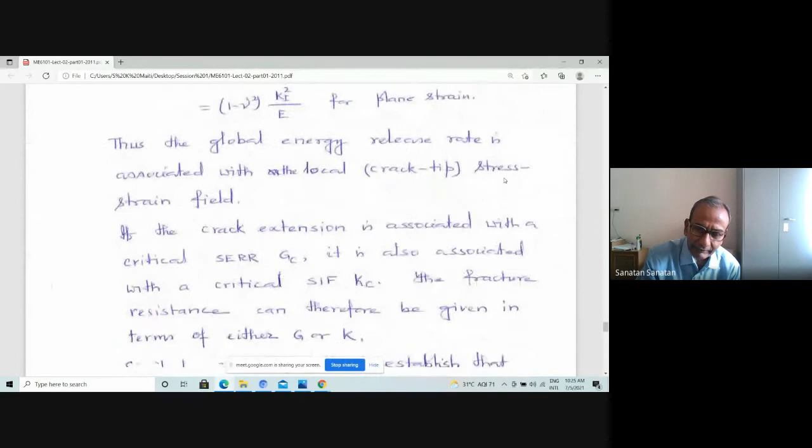by this theory. So that's how it became a new way of understanding material failure, and it also overcomes the question of stress at a point. It is stress around a zone, and that's what it is.

And therefore, for all three modes of crack extension - tensile mode, shear mode, and tearing mode - Griffith theory was related to Irwin's theory. For all three modes, he gave the final position that for mode 1, this G subscript 1 is related to K subscript 1 at the point of onset of crack extension. This is therefore KI reaching a critical value KIC, which is a critical condition for crack extension.

Similarly, we also established that G2, the mode 2 strain energy release rate, is related to K2 squared by E, where K2 is the mode 2 stress intensity factor, and for mode 3, G3 is the Griffith's energy, and K3 is the SIF related to strain energy release rate. So if somebody says that Griffith's condition is G equal to G critical, then according to Irwin, it is K equal to Kc that is the critical condition. So that's how they became interrelated, giving sound understanding validated from the point of view of energy and also from the point of view of stresses and strains.

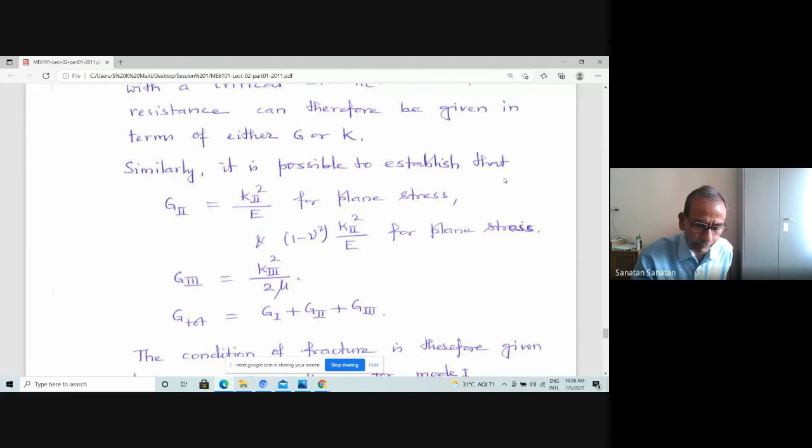But after the evolution of Irwin's theory of stress intensity factor, the application of fracture mechanics became much easier. After about 1960, lots of calculations and mathematics were done to find the stress intensity factor for components of different shapes and sizes, just like with stress concentration factor based design, which made it imperative that handbooks be written and published.

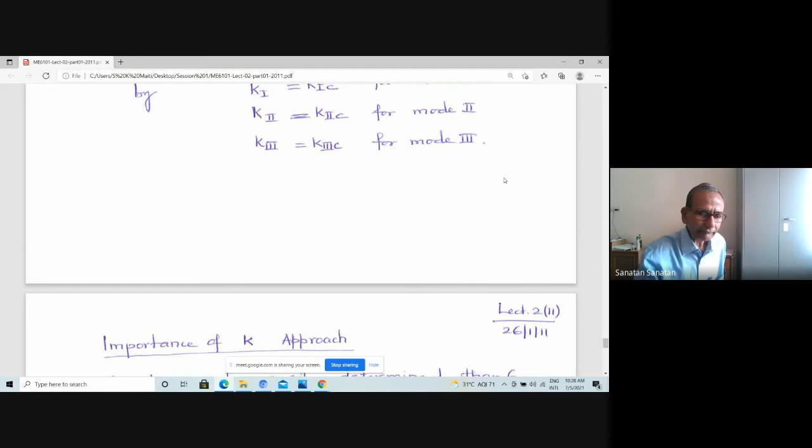In fracture mechanics, after the evolution of the stress intensity factor concept in the 1960s, people started considering varieties of components and their loading, giving rise to solutions collected in stress intensity factor handbooks for design use. There are 4 or 5 such handbooks widely used in practice, and that's how the stress intensity factor concept became very important and widely applied.

So let us take up the importance of the K approach. First of all, K, the stress intensity factor, can be easily determined compared to G, which is difficult to calculate. That was another stumbling block in applying the strain energy release rate concept.

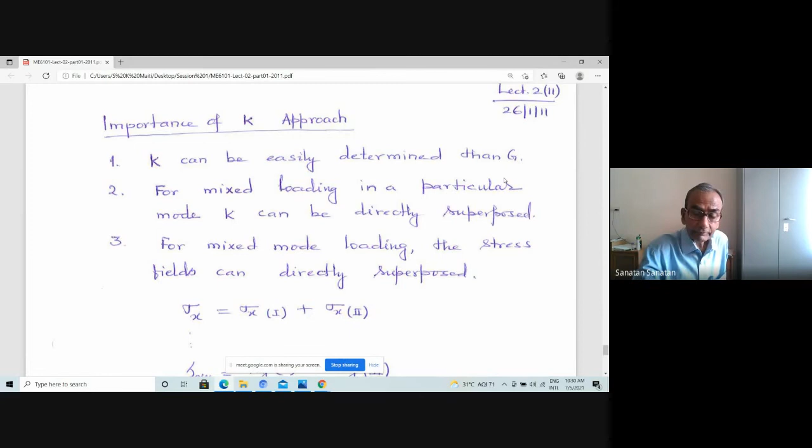For mixed loading in a particular mode, the solution for K can also be easily obtained, which made it easy to apply the stress intensity factor approach to mixed mode problems. The stress fields for mixed mode loading can also be handled this way: if a problem involves more than one mode, the stresses are obtained by simply superposing the stresses from the individual modes.

For example, sigma x in a mixed mode problem is sigma x in mode 1 plus sigma x in mode 2, and if a third mode is present, you can superpose that too. So you can calculate the stresses in mixed mode problems very easily, routinely.

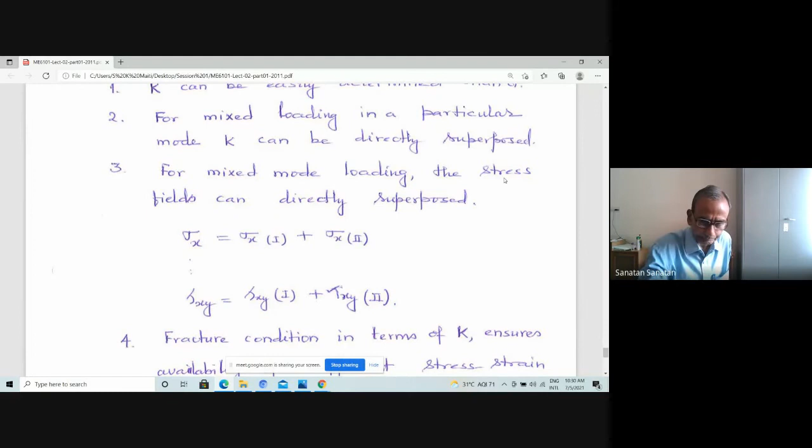Another important point: fracture conditions expressed in terms of K ensure availability of both stress and energy conditions. The fracture condition in terms of K ensures sufficient stress and strain field around the crack tip to break atomic bonds, plus availability of enough energy for creation of new surfaces. So fracture condition in terms of K is inclusive of both necessary and sufficient conditions - the necessary condition being sufficient stress field, and the sufficient condition being availability of energy.

So fracture in terms of K ensures both necessary and sufficient conditions, but in the case of energy-based criterion, it does not ensure both conditions, and therefore it is lacking. K is a much stronger criterion than the G-based criterion.

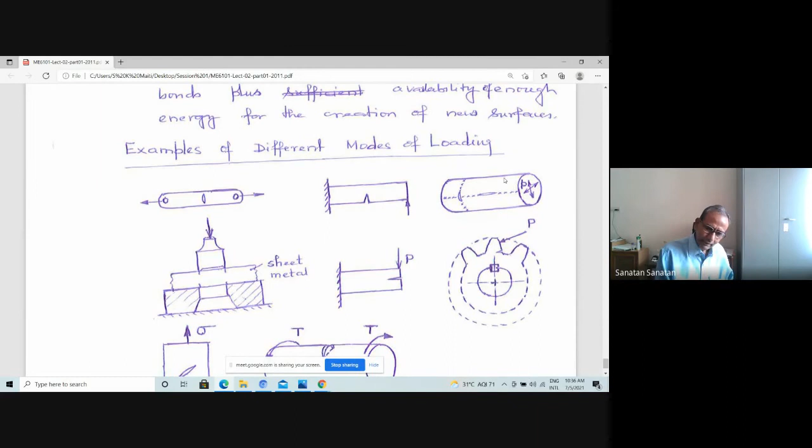If you consider this as a rectangular beam and try to plot the shear stress variation, and if you take a section slightly to the left of the load plane, there will be some bending moment and the shear force will be of magnitude P. That P gives rise to shear stresses in the horizontal plane. At every plane there will be shear stress. The shear stress is zero at the top and bottom fiber, and maximum at the center, with a parabolic variation.

So if this crack lies at the center line, the shear stress along the center line is going to be maximum. That means if you consider this beam split into two segments about the center line, top half and bottom half, because of this loading those two halves are trying to shear one over the other. If you consider a glue joint at the center line, that glue line will be subjected to shear stress, and the crack will be extended by shear stresses along the center line. That is mode 2 loading on the component. So that's very important.

And look at the gear tooth. If you have the loading on the gear tooth, what sort of loading is there on the crack plane? Somebody should try again. What is the loading on the crack, or on the crack plane? It will be shear, sir. Yeah, shear is there, but at the same time there's also a bending moment.

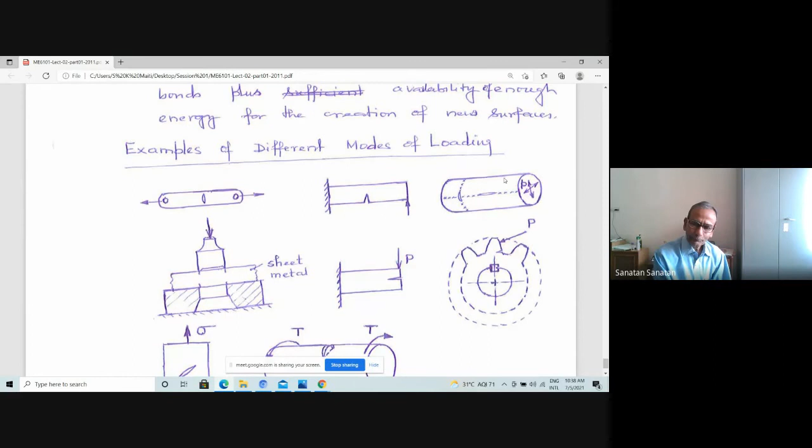So it is mixed mode. If you consider it as a cantilever beam from the root of the tooth, the load P, acting at a distance, will give both bending moment and shear force. Therefore it is a mixed mode problem. That's how it is.

Let's see the next example. Look at this left example. What is this? I want some answer from some people here. The thin plate subjected to tensile load, and a shaft subjected to torsion load. Torsion, yes. No, the left one, what is it? What are the modes you think of it? It will be tearing mode, sir. Tearing mode, okay, only one?

Sir, it is mode 1 and mode 2. Correct, that's how it is. If you think of that sigma acting at an angle with the crack plane, you can break it into a component parallel to the crack and another component normal to the crack. The load component parallel to the crack gives rise to shearing, mode 2. The component perpendicular to the crack gives opening mode. So it is mode 1 and mode 2 combinations.

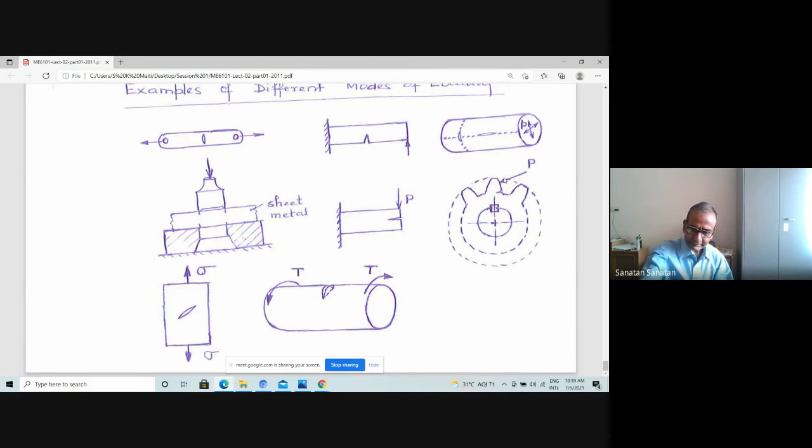I think this is what we probably wanted to cover. If you have any queries or questions, please raise them. We have time, at least another 10 minutes we can spend on the question and answer session. If you have anything, any questions, please try to understand.

So finally, to sum up, I have tried to give you the developments that have taken place leading to the development of the damage tolerance concept, whose basis is fracture mechanics, and how it has evolved. The concept is really from the very basics of material science, but gradually the development was having problems at every stage, and those problems or queries have been answered. Gradually all the queries and questions were solved, and finally it was developed into a subject which is not science, but more of engineering.

This development has given rise to a very rational basis for handling the associated modeling, plus the development of material data or collection of material data, and using them to do the design. That's how it is, and it has been able to answer many unsolved questions related to classical design.

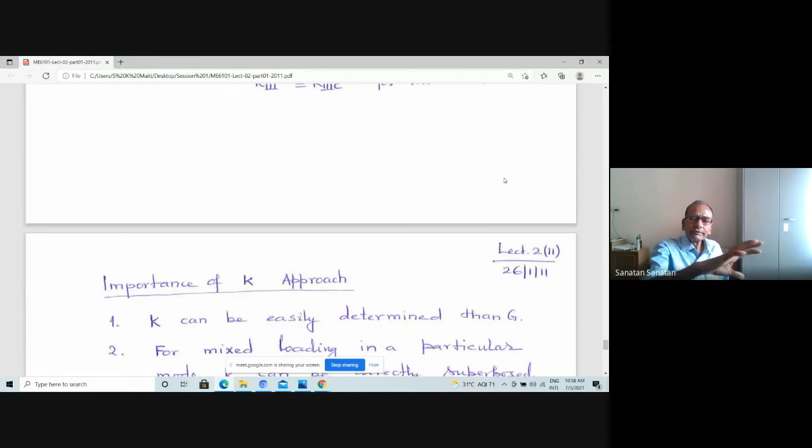It actually helps you to overcome the concept of failure in terms of a value of stress and strain at a point, but rather a region of stress field around the crack tip. It conveys the idea of a region of stress and strain around the crack tip. So it gives a domain - not a single point, but a domain around the crack tip.

How much of gravity of loading is there is conveyed by stress intensity factor. In that sense it is much different - it gives the idea of democratic government. It's not dictatorship by a single fellow. It is actually distribution, importance of a group of points. That's why it is stress intensity factor, and it has tremendous importance.

It's a new way - it is the stress field, not stress at a point, stress field around the crack tip, and it also conveys the idea of energy available for crack extension as it extends. That's all.

One more clarification, sir - stress intensity factor, how far is it different from the notch sensitivity factor? Notch is having a finite radius, whereas crack has actually zero radius.